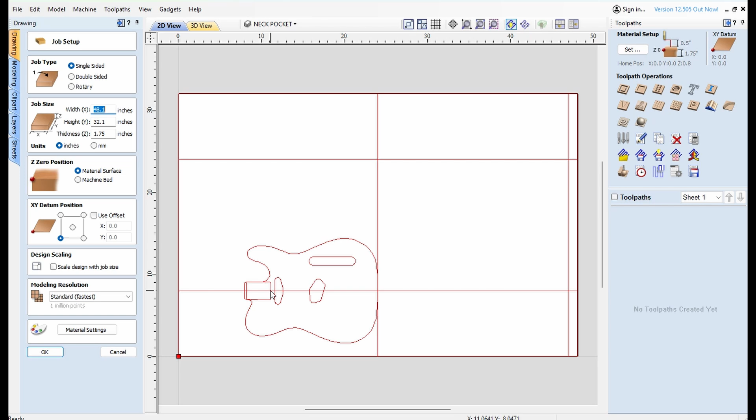to start with, let's go over here and look at the setup. Again, I always leave mine the full. I have a Journeyman, so it's 48 by 32, and it shows the full thing. But what I'm getting at right here is 1.75 thick. That's the standard thickness of a body, and that's what I use. So we'll hit OK. We'll zoom in a little bit more so you can see.

Okay, so now let's start to work, and let's think about this a little bit. Where do we want to start? Which one do we want to cut first? It doesn't really matter, except that you probably don't want to cut the outer contour first, because you'll only have a couple of tabs hanging on for cutting the rest of this. So let's decide now that we want to do that last.

Okay, so let's just start, for whatever reason, with the bridge pickup. So we'll get the bridge pickup, and we want to make a pocket. That's right. I know that various Teles have various depths for the pickup pockets, depending what year, whatever. I always use 3/4 of an inch, 0.75. There's some modern pickups that are stacked. Who knows what you're gonna put in there. So you might as well make them deep enough to handle everything. It maybe will take a little bit longer to machine it out, but that little bit doesn't matter.

I use a 6mm bit that I have set up for basswood. That's speeds and feeds. You may be cutting something else, so your bit may vary. It's going to take it 2 passes. I normally do a conventional cut, not a climb cut. I normally ramp my plunge moves. Okay, I'm going to go 1 inch here. Just puts less stress on the bit. I push mine pretty hard.

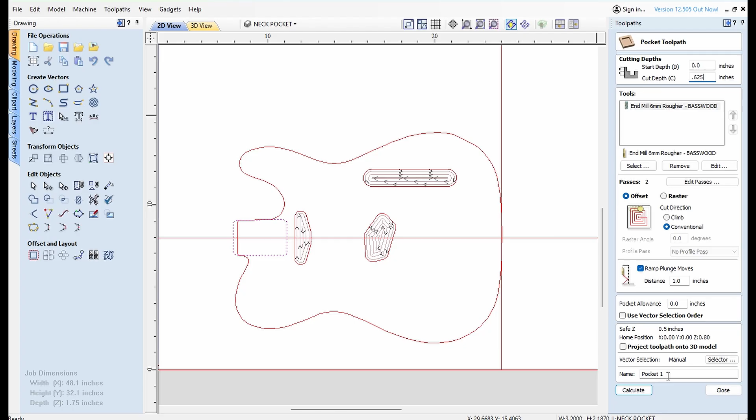Very nice. I guess the only thing left besides the profile is the neck pocket. So let's get the neck pocket. We'll make another pocket just like it sounds. This one, Fender Standard, is 5/8. So 5/8 is 0.625. We're going to ramp it. We're going to do all that other stuff. The only other change we're going to make is call it the neck pocket.

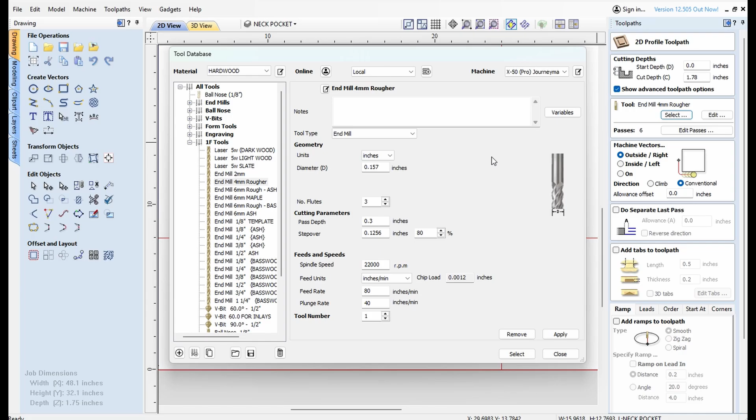Okay. Lastly, now we can finally cut the outer profile. So what we'll do is we will highlight the outer profile. We're not going to pocket it, okay? We're going to use the profile toolpath. So these are 1.75 thick. Because I use a sacrificial spoil board under all mine, I normally cut them about 30 thousandths deeper. Gives me a nice clean cut. Okay, select, I don't know why that's gone 4 millimeter. I'm going to go 6 millimeter basswood.

And right here I want to go on the outside because this is my final dimension. So I want to go on the outside. Regular conventional cut is fine. And I do want to add some tabs. Remember, this thing's in a blank. It's about 16 inches long and about 13.5 inches wide. So I will normally put a clamp right here and right here, if you can think of a square around the outside of that thing. So I'm going to want to put tabs right about here and right about here because that'll hold on to it while I'm cutting through. So let's add some tabs. Go over here, add some tabs.

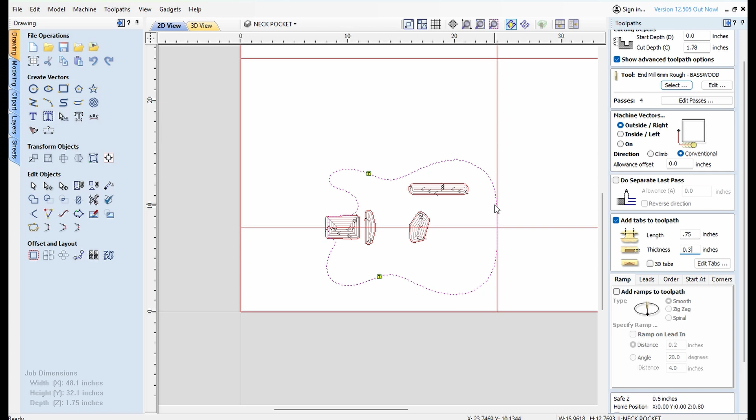I normally like my tabs about 3/4 of an inch long, and I like them about 0.3 thick. Okay, and I want to edit those tabs. Oh, look, I put them in about the right spot. I don't even know that I want to edit them. That looks good to me, honestly. So we'll leave those tabs there. Do we ramp? I always ramp just a little bit, not a whole lot, because of the geometry. So I'm going to leave that at 0.2, and I'm going to call this outer profile.

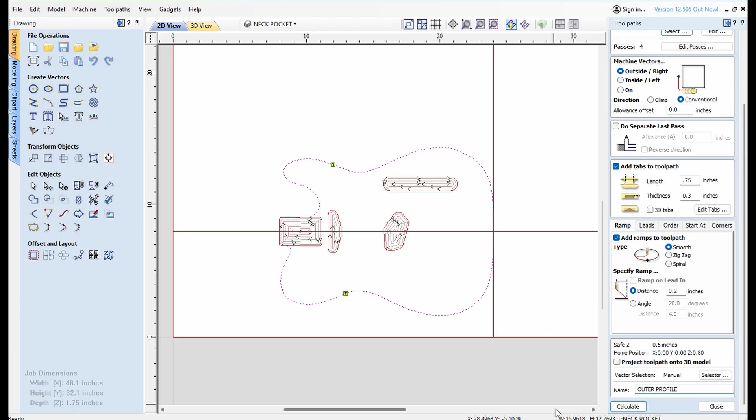Because this is so thick, be careful of what bit you're using. It's got to be deep enough to cut all the way through that. So be careful there. And some guys will do a last pass to kind of clean it up. I have found that I don't need to with these speeds and feeds. I don't need to do a last pass. It's pretty clean, and I go around the edge with a big drum sander all the time anyhow, so that's not going to matter. So let's calculate that. It tells me it's going to cut through, and I want it to.

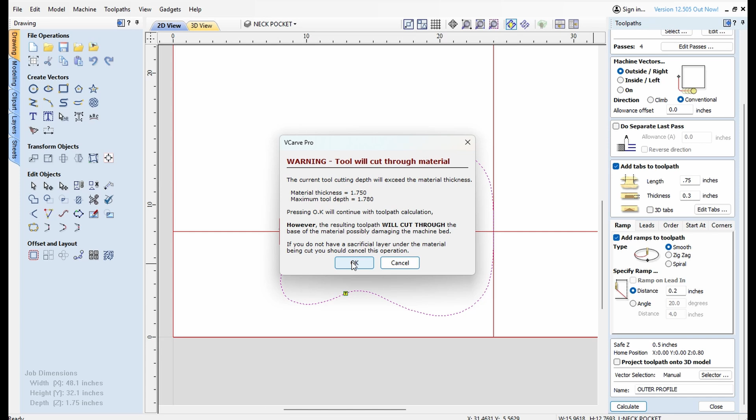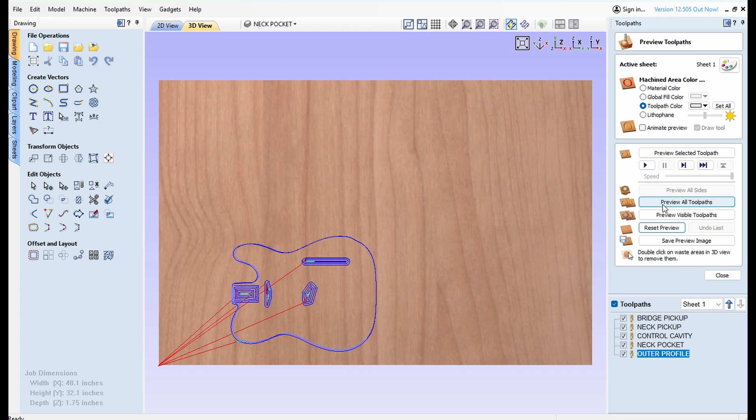Again, your mileage may vary, so kind of figure out what you're going to do as far as spoil board or whatever. Maybe you want to go right to the bottom. Maybe you want to leave a little bit. That's up to you. Okay, so it has calculated it. And here we see everything. You'll notice that my outer profile is all the way at the bottom. So I want to cut the outer profile last. This is the order that I want to do. I am going to reset the preview, and then I always preview these things. I always do that just because you can make a mistake and you don't see it, and something weird happens when you're machining it.

So I will always, you can see it's putting them all in. There you go. You can see the tabs are there. Let me zoom in a little bit. Let me move her to the middle. You can see there's a tab there. You can see there's a tab there. I'll tilt it for you a little bit so we can see what's going on. That looks pretty good. That is what I want to cut. So I'm going to call that good.

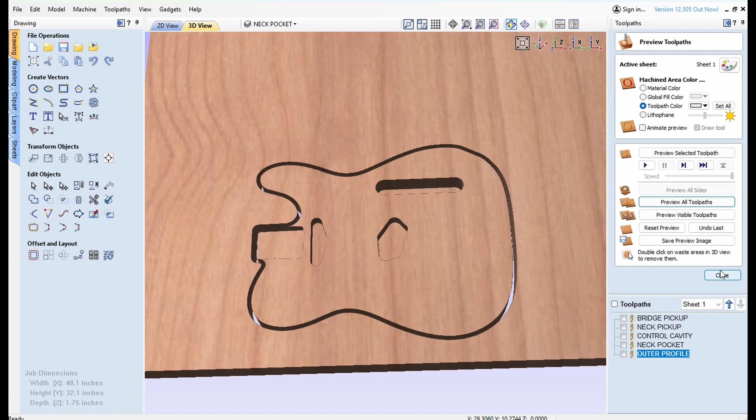Call that good. I'm going to go back to my 2D view. Now I'm going to make absolutely sure that I select all of the toolpaths, because what I'm going to do now is generate the G-code here where it's saved toolpath.

I'm going to generate that. I can do this because all of these are the same router bit. I don't have to change bits, I don't have to do any of that. So that's primarily why I use a 6mm router bit for a lot of the stuff that I do.

Okay, so we're looking at all the toolpaths. All of them are there. Looks good, let's save this toolpath. And if I were actually saving this, well, let's just actually save it. I'll save it right there and I'll put this toolpath. Don't worry about where it's putting it, I'll go back later and fix it, but save the toolpath. Okay, so we save the toolpath.

Another thing I have to note here, for me personally, what I'll do when I'm ready to machine this is I'll move it to a jump drive, because the shop is not on the same Wi-Fi, and I just find it easier to move it with a jump drive. And then I'll move it over there, and you can see that video. That'll be linked to this one, there'll be a link down below, and you can see how I do that.